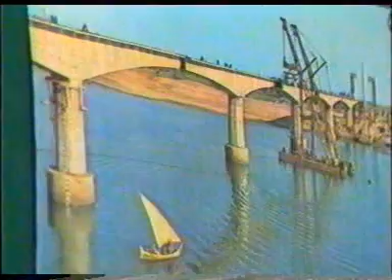For any civil engineering project, it is necessary to plan an appropriate soil investigation program. Investigation of underground conditions at the site is an essential prerequisite for economy in design and construction of foundation for any engineering structure.

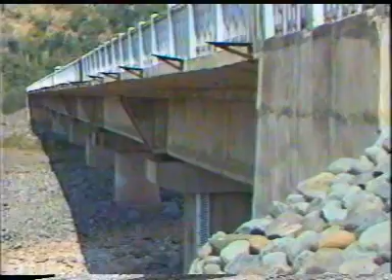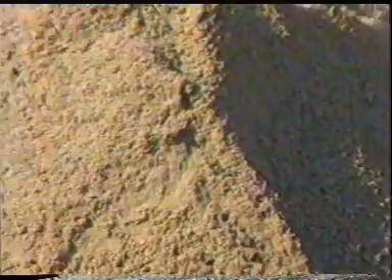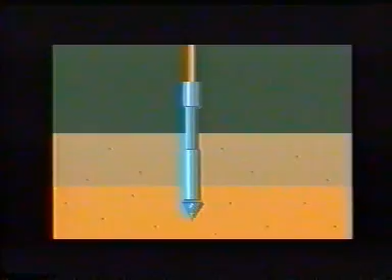The principal objective of soil investigation is to assess the properties and behavior of soil as an engineering material. There are many techniques and methods of soil investigation. These are boring, pit sampling, drilling, and geophysical methods. One of the major techniques to measure the strength characteristics of soil is by determining its resistance to penetration.

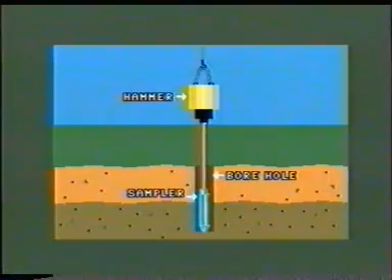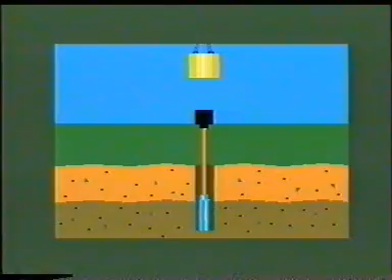A commonly used and relatively economical method is the standard penetration test. In this test, a standard sampler is driven into the soil by the impact of a falling hammer to determine the penetration resistance of the soil. Let us now see the equipment and procedure for conducting the standard penetration test.

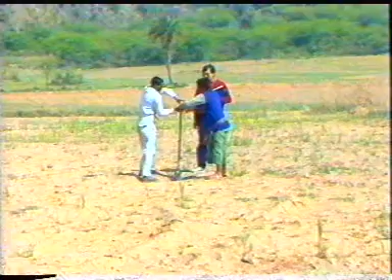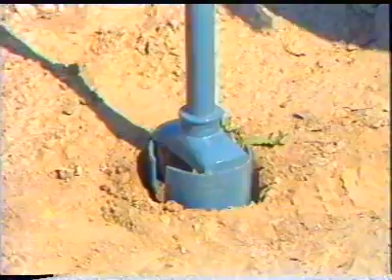The location where the test has to be conducted is marked on the ground. A borehole of about 100 to 150 millimeter dia is made up to the depth where the test has to be carried out.

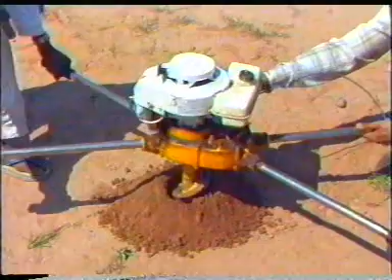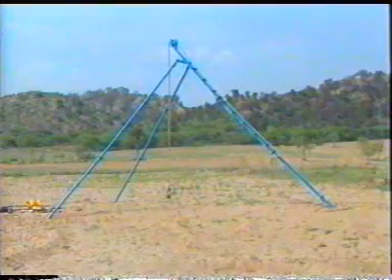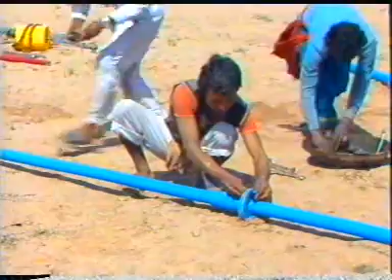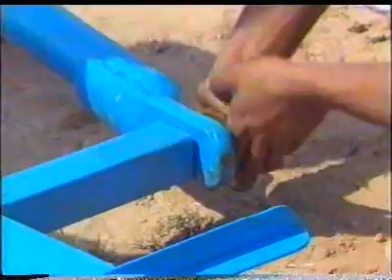This is how the test setup looks when assembled. Two legs of the tripod consist of hollow pipes and the third is a ladder section. First of all, the tripod is to be fixed. Ensure that nuts are fastened tightly so that when erected, the tripod is stable. These nuts are fastened partially so as to keep these joints flexible.

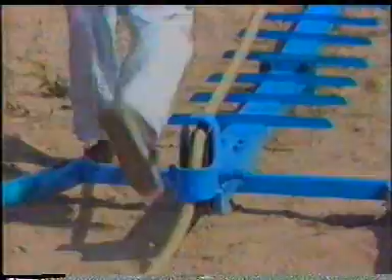A thick and strong rope with an iron hook on one end is passed over the pulley. The tripod is thus ready for its erection. The tripod is erected by lifting it manually, giving adequate support from all sides.

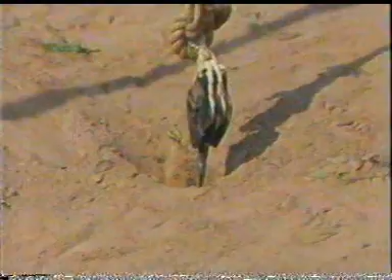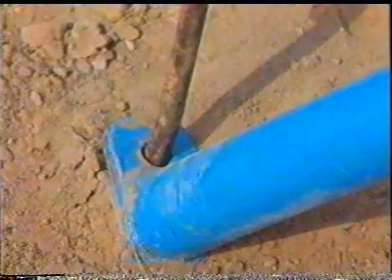The tripod is centered by adjusting the legs so that the hook suspended from the pulley is over the bore hole. All the legs are firmly anchored to the ground by means of arrows.

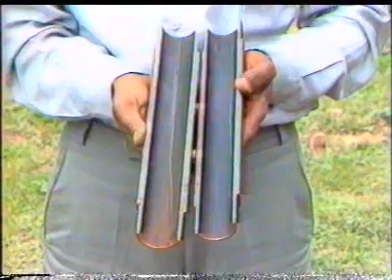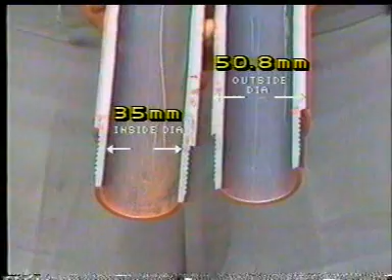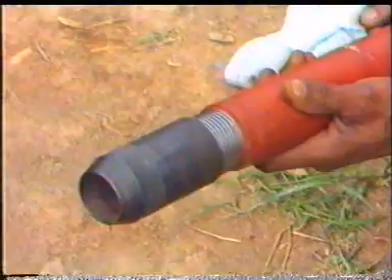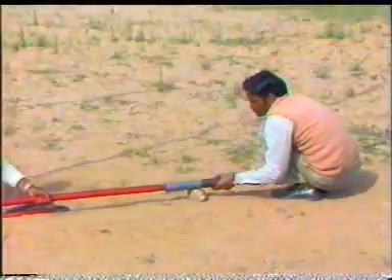The split spoon sampler used for penetration in this test has an outside diameter of 50.8 millimeters and inside diameter of 35 millimeters. The sampler is cleaned and assembled. Check that it does not have a damaged drive shoe. The sampler head is now connected to the A rod using a coupling in between.

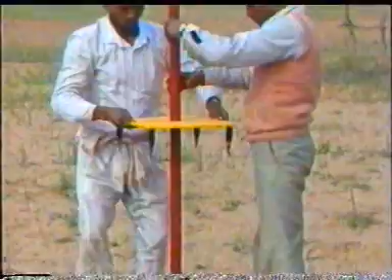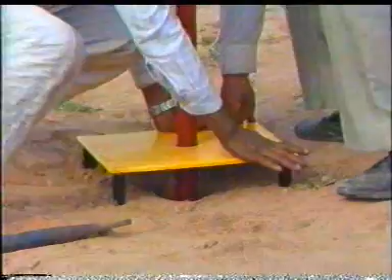The sampler is then lowered into the bore hole. To keep the drive rod vertical, a centric guide is inserted and fixed on the ground. Marks at set heights of 15, 30 and 45 centimeters above the centric guide are made on the drive rod.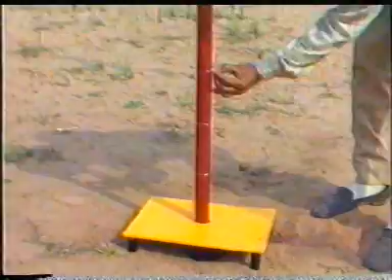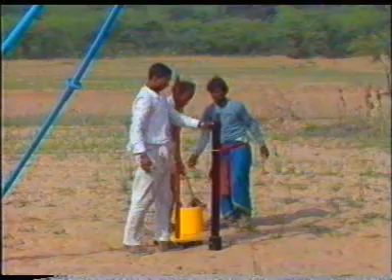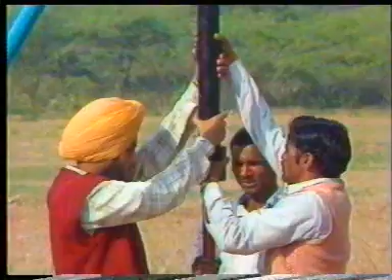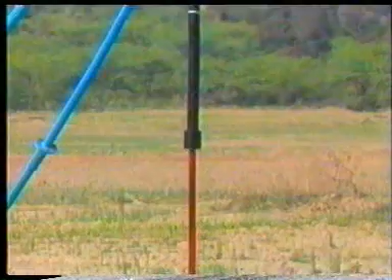A guide rod having a mark 75 centimeters above the driving head is connected to the drill rod using a coupling. The rope is lowered and the hammer chain is hooked to it. The hammer has a mass of 63.5 kilograms.

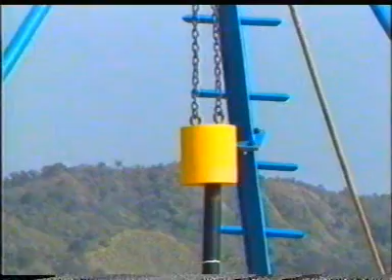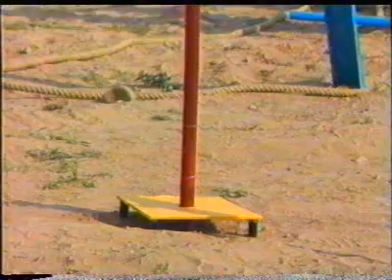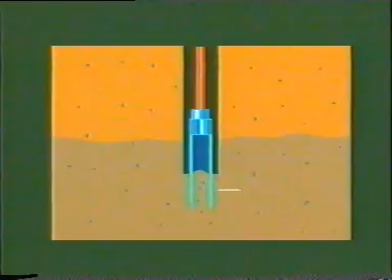The hammer is raised up to the 75 centimeter mark. Allow it to fall freely. In this manner, the sampler is driven into the soil, but the number of blows for the first 15 centimeter penetration are not recorded. Driving is continued for the next 30 centimeter penetration, and the number of blows for each 15 centimeter penetration are counted. The total number of blows is known as the observed N value. For taking out the sampler, blows are imparted in the reverse direction.

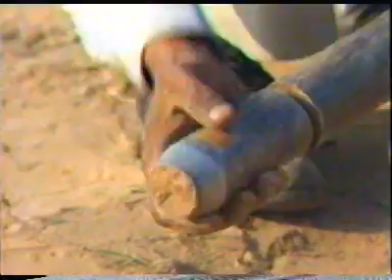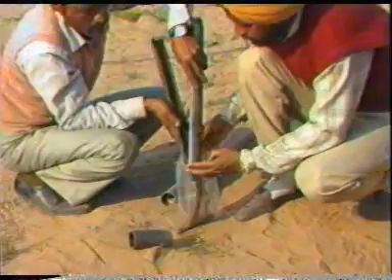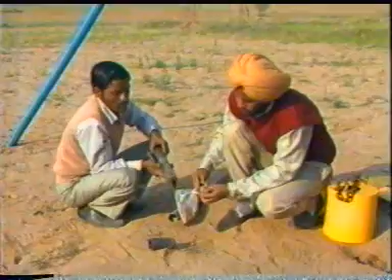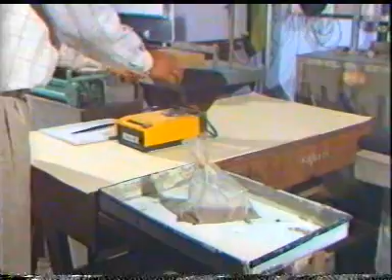Open the sampler and visually examine the soil sample. Observations based on visual examination are recorded in a proforma. Note that the sample obtained from the test is a disturbed sample. The soil sample can also be used for relevant laboratory tests.

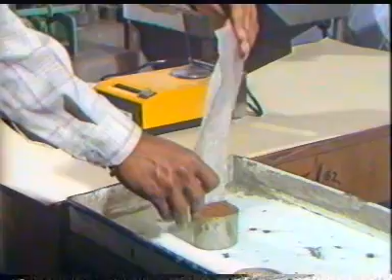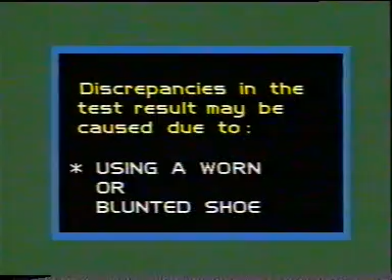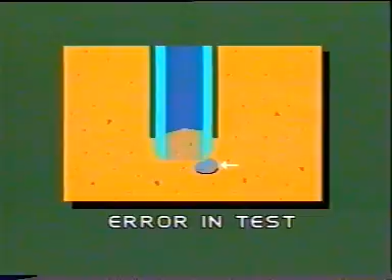The test is suitable for sandy soils which do not have gravels or rocky stratum. If the number of blows for any 15 centimeter penetration exceeds 50, the test should be discontinued and it is recorded as refusal. Discrepancies in the test result may be caused due to using a worn or blunted shoe, a rock or stone piece coming directly below the cutting edge, or using a liner inside the sampler.

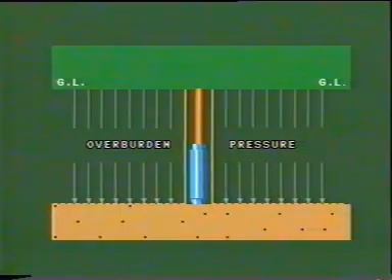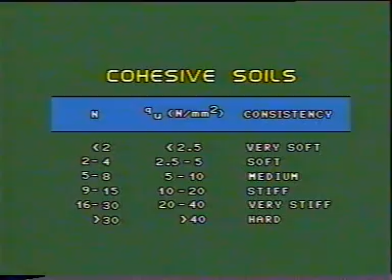Extensive experience has enabled establishing empirical relationships of N value with various soil characteristics. For cohesive soils, with the knowledge of N value, it is possible to have an idea of unconfined compressive strength and consistency. For granular soils, based upon the N value, various parameters like relative density, angle of shearing resistance, etc. can be estimated.

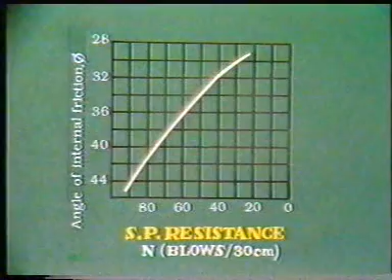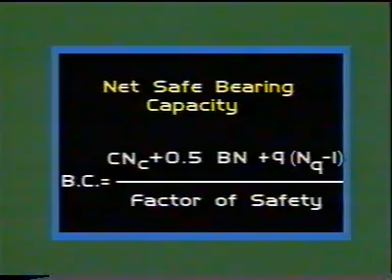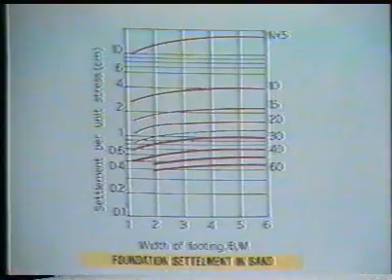This graph shows how the value of angle of shearing resistance phi is related with N value. Knowing values of phi, the values of bearing capacity factors Nc, Nq, and N gamma are obtained from the graph, and using this equation, net safe bearing capacity against shear failure can be estimated. It is also possible to estimate the net foundation loading intensity for a given permissible settlement. The lesser of these two values is the desired allowable bearing capacity and is used for foundation design.

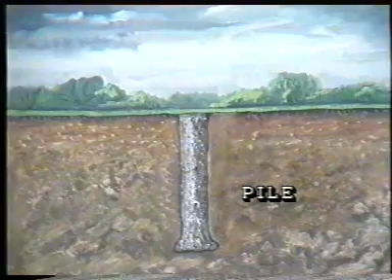From the same graph, the probable settlement of footings for different foundation loading intensity can be obtained. The N value is also useful to determine the bearing capacity in case of piles. Though N value has many applications, it should be used cautiously in dense saturated fine sand and silts and highly sensitive clays. Now let us summarize.

In the standard penetration test, the number of blows required for 30 centimeter penetration of a standard sampler by a freely falling hammer of standard weight is noted. Knowing the N value, we can obtain information about various soil characteristics like shear strength, consistency, relative density, unconfined compressive strength, etc. This information is quite useful for design of foundations.